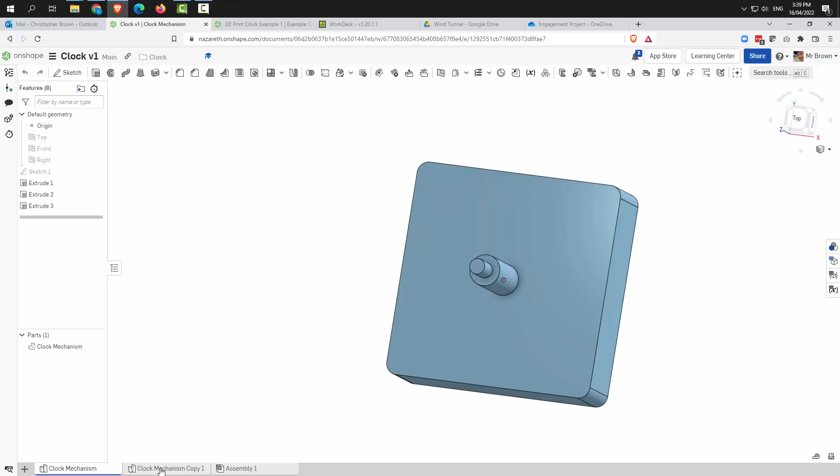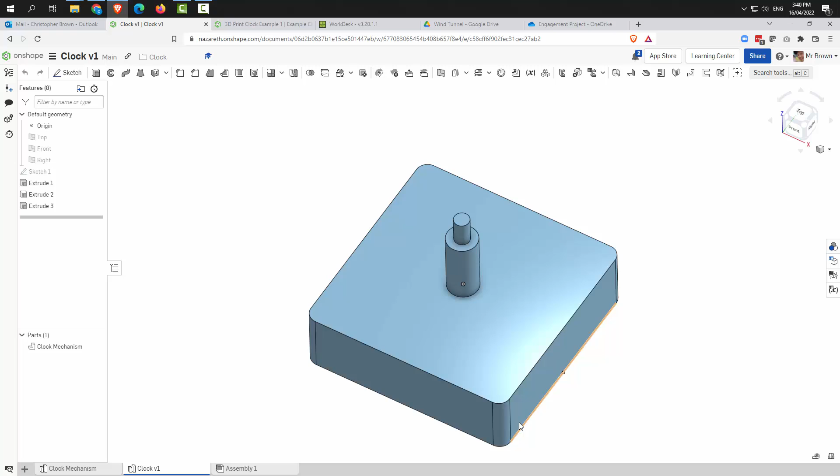It's got its own part studio, and we've renamed the part here. So the first thing we're going to do is right click down here and go duplicate, and we'll right click on this clock mechanism, copy one, and rename this one clock version 1, because you might want to draw more than one. Now this is important because the mechanism must be incorporated into the design, and it's the same mechanism for everyone, so drawing this mechanism, making sure you get it right, will help you draw everything else.

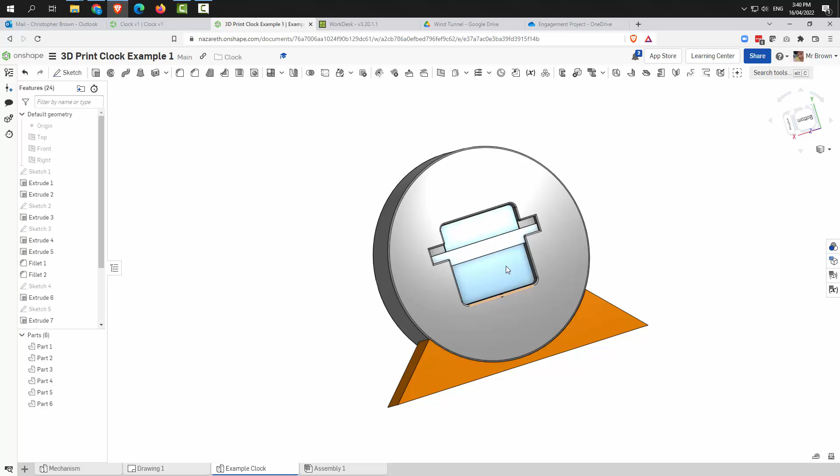Now I just want to show you very quickly, this is something I drew a little bit earlier. I know aesthetically it doesn't really look that good, but you can see the mechanism in here, okay, and I've incorporated it into the design. I've even put something in there to hold it in, although it doesn't really need it. So you can see the clock, the mechanism is inside there.

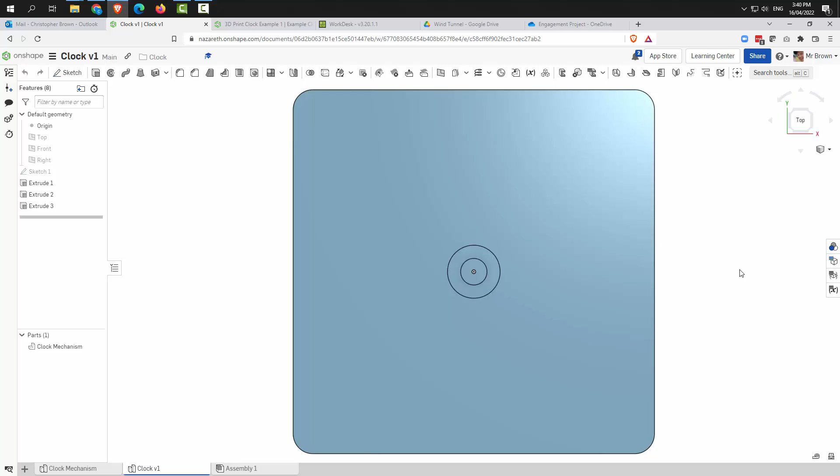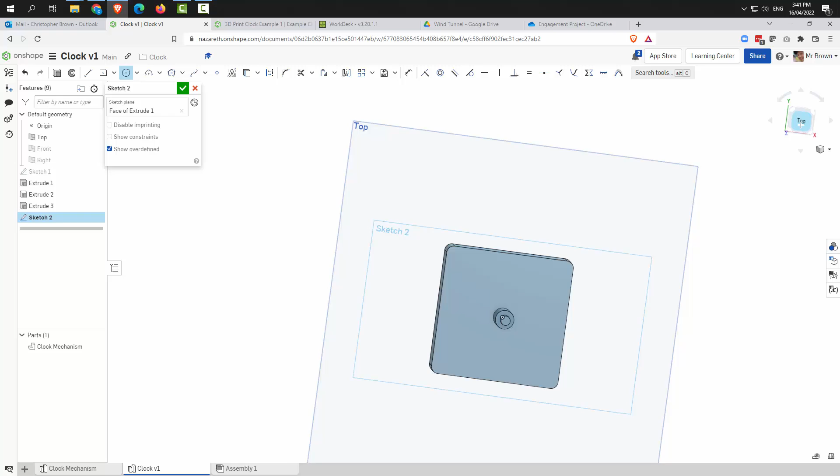Alright, so back to this one. What we'll do first is put a sketch. So if you have a look at our top plane, it cuts through there, so we can put a sketch on the top plane, or you can just click this bit here, and then you'll have a sort of shape. I'm just going to run with a circle because it's easy to understand. Now our printer is 150, that's as big as it'll go.

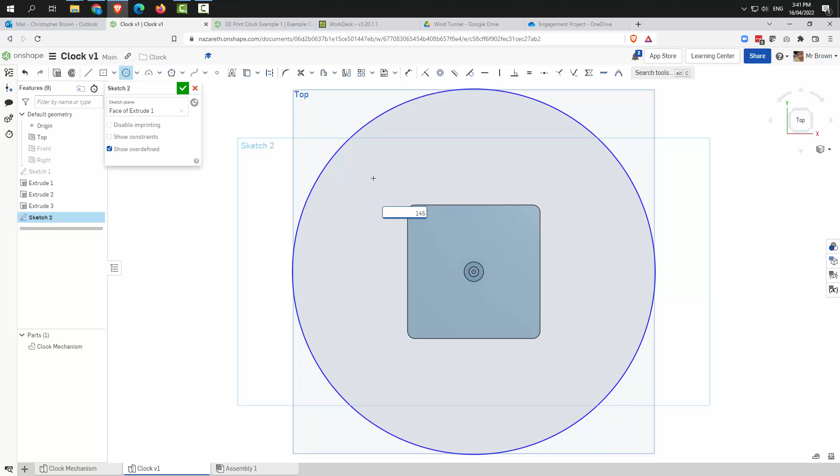So if you wanted to go bigger, you need to figure out how to put it into different parts, which is fine. Just for simplicity's sake, and since this is just a video on how to incorporate this, I'll make it a bit smaller just to make sure it works. So you can see I've got a 145 diameter circle, centered on this center point here.

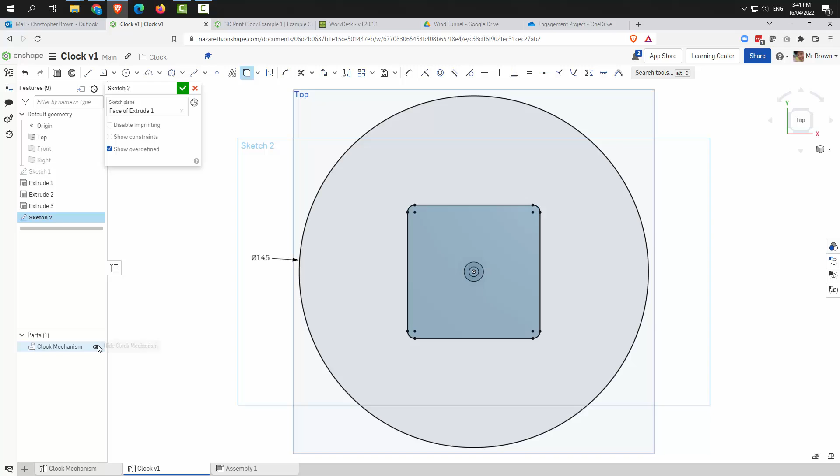Alright, what I want to do too, if they're not already, is grab these lines. So if I hide the clock mechanism, you can see that's all there, and I want these ones too. So you can see that's all there. I might keep that hidden.

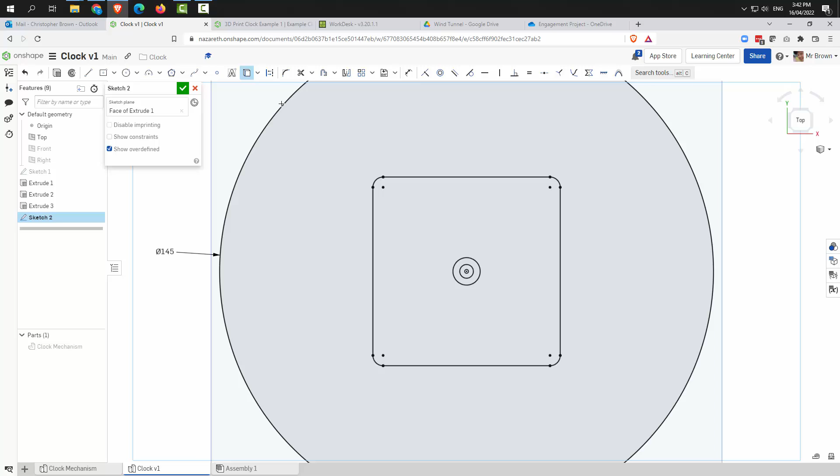Now with our clock mechanism, we can't make our clock the exact same size. We need to leave a little bit of wiggle room, so that's where offset really helps. We're going to click these lines. Doesn't look like there's an easy way to click them, so I'm just going to go around and click them all.

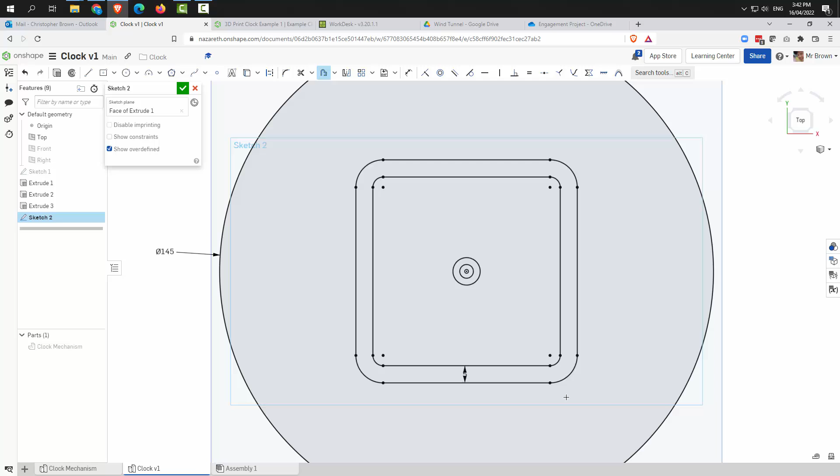And we're just going to add a half mil. So our size, remember, is 55, so half a mil on each side will make it 56. There's not a lot of wiggle room, but there's just enough. We're going to do the same here with this outside one, so it wants to do 5, but we just want to do 0.5, and we're going to click that.

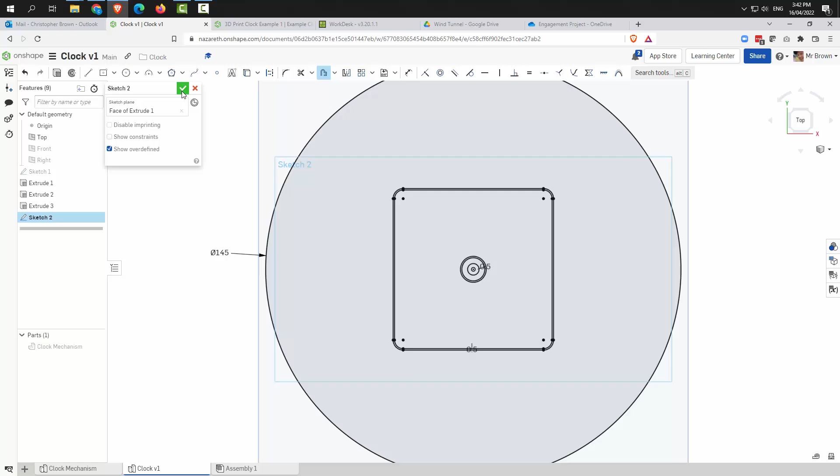Okay, and then we're going to give it a tick. Now we'll bring our mechanism back, and you can see that bit's there. Now we'll extrude this outside section, send it the other way, and you can see that little gap is there. So if we go around the back, we can see it still works.

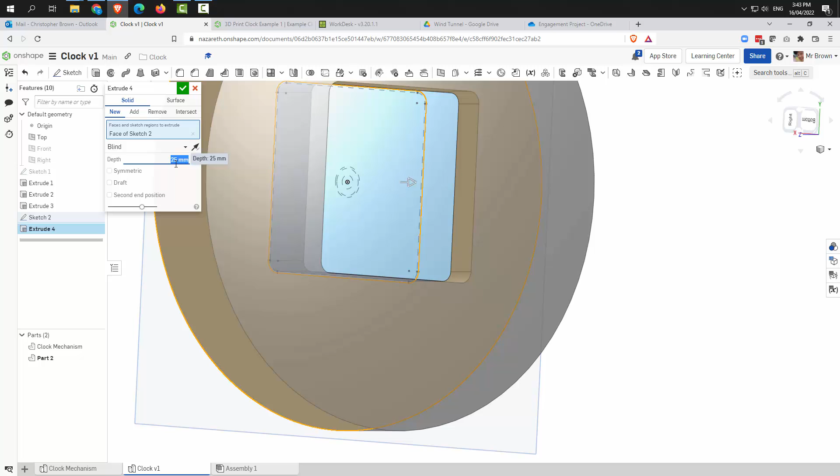I'm going to do it, it's 16 mil deep, remember this section, I'm going to do it 20. And you can see it's sitting in there nicely with a little bit of a gap. How this holds in is there's a nut that screws on this big diameter here, this 8 mil diameter, and that will hold it on when you put something on the front.

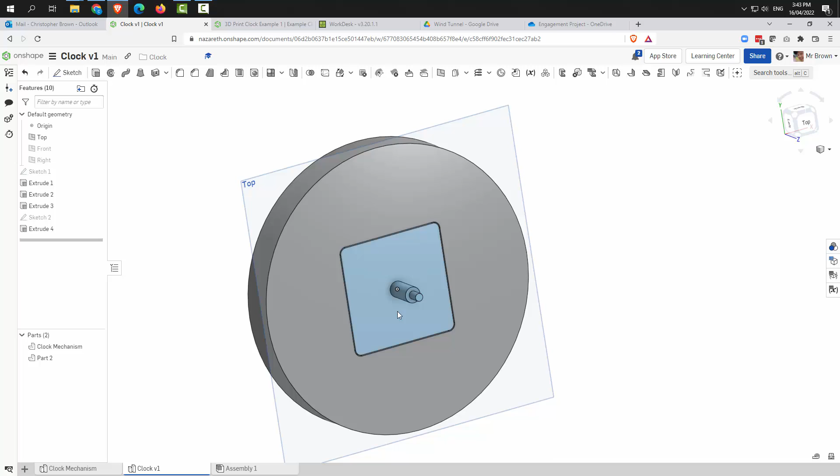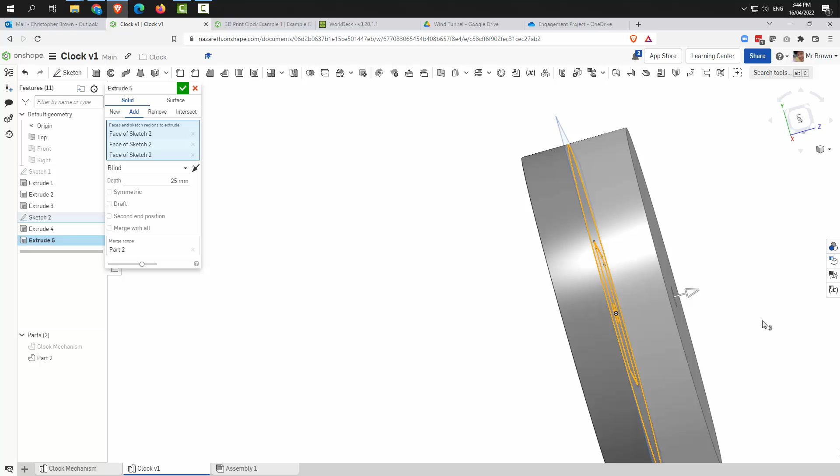So what I might do next is bring our sketch 2 back, get rid of the mechanism, and basically leave those circles and click everything on the outside, so even that little bit and that little bit. So you can see it's trying to add on to part 2 here, merge scope part 2.

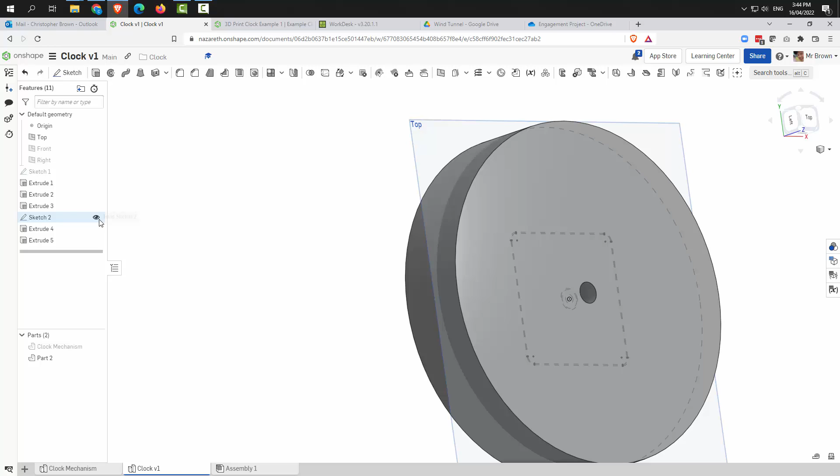I'm going to just make this, can't go any more than 15, or even 14, so I reckon I'll just go 12. And click the tick, I'm going to get rid of that sketch. So obviously yours will look a little bit different to mine, but this is just a basic way of how you could put this clock together.

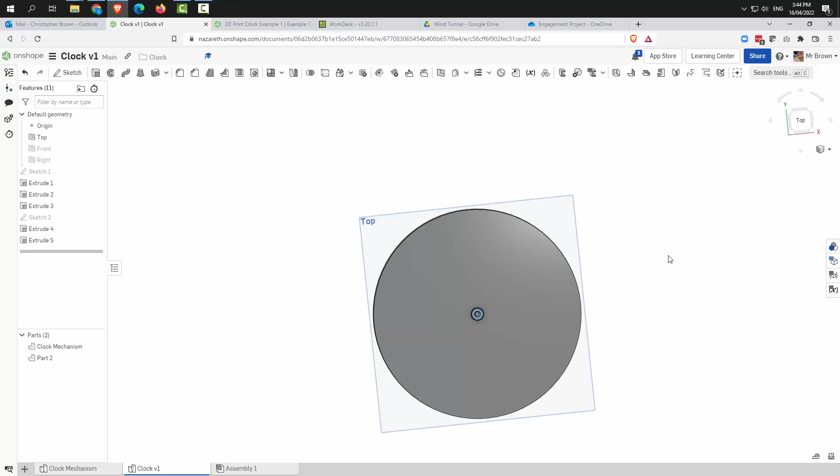So you can see now that the mechanism fits in. There's a tiny gap around it everywhere, and on the other side there's that tiny gap, and that's plenty enough for it to fit in. So when you're doing yours, just make sure you have that little tolerance, that little gap in between, because otherwise it may not fit in as you think.